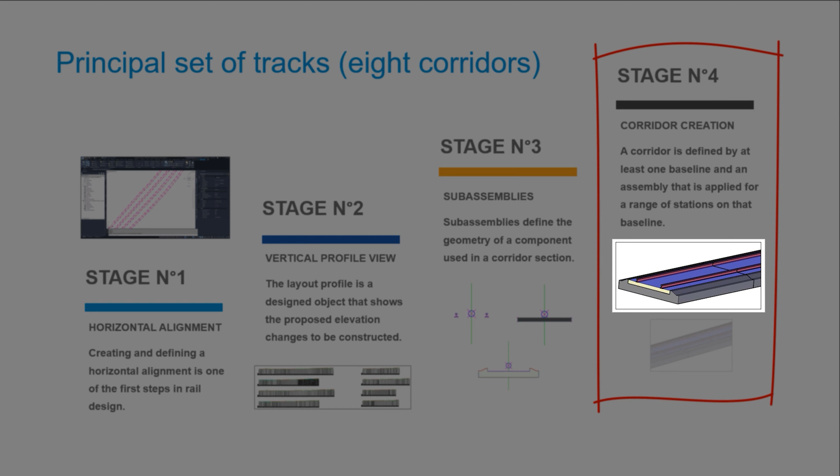Traditionally, when designing a corridor, all assemblies are based on the same stations, or abscissas. SNCF Réseau has another expectation for their maintenance business and asks us to allow different regions per component, different stations for rail, ballast, and sleepers.

So we need to use several baselines in the same corridor definition, one for each component. It is a heavier behavior, but we can automate it.

Underground structures are also completed with the same traditional design approach. Unfortunately, we do not have dedicated survey plans, and the service provider did not complete a LiDAR static scan.

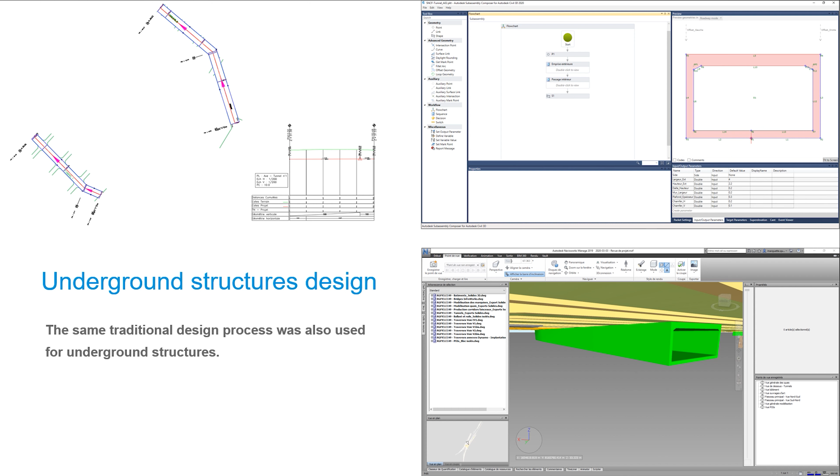Do not forget that underground structures could be an important trade for passenger stations, especially in a highly urbanized city like Paris. Reality capture or topographic surveys are more complex and require particular expertise, especially when you must rely on previous points, as contractors can do for tunnels in the Grand Paris Express project.

Here we just fix some hypotheses, because the civil engineering part is not the top priority for the rail maintenance teams, but this topic is important for the federated model and synthesis phase.

Autodesk Civil 3D also allows another model authoring process without an alignment and profile line. The 3D baseline is normally the merger of these two entities, but you can also ask Civil 3D to use the feature line directly as a baseline for corridor creation.

It is a quicker solution, but you cannot calculate cant or super elevation with this. Please notice you must have at least the 2017 release of Autodesk Civil 3D to use this function.

Step number 1. To start, you need to convert a standard polyline into a feature line object. Please use a 3D polyline directly if you have it, and avoid a 2D CAD object.

You can define a name for the feature line, a style, a dedicated layer, and insert it in a site. For this project, we created the feature line by using 2D center lines dropped onto the existing ground TIN surfaces.

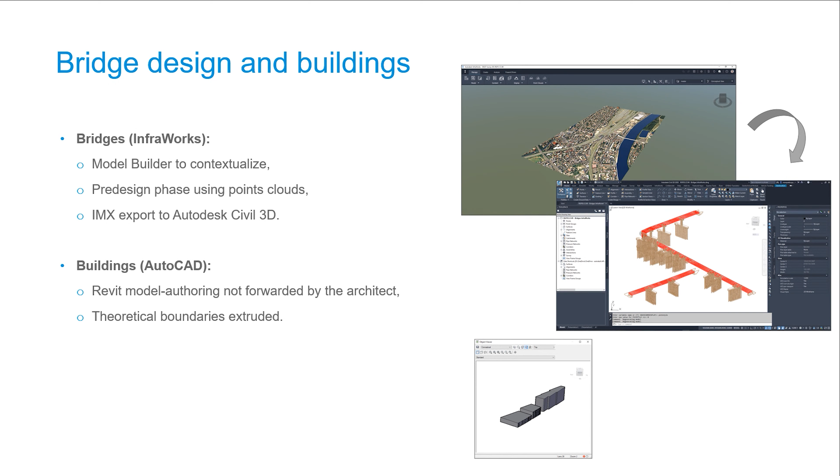Bridges are created using the grade preliminary function of InfraWorks. During the project, we used the 2020 release of Autodesk Civil 3D, and the new bridge category available with the 2021 release was not available yet. We recreated 3 bridges in InfraWorks based on the point cloud elevation, then exported it to Civil 3D through an IMX export.

Bridge design was not really part of our business, so we kept it as single 3D solids. The bridge components are default libraries of InfraWorks, but we could also customize them with Inventor.

Unfortunately, for the maintenance building and the two passenger buildings, Revit models were not forwarded by the architect. So we decided to extrude only the initial plan survey polylines, but why not in the future try to have the original models.

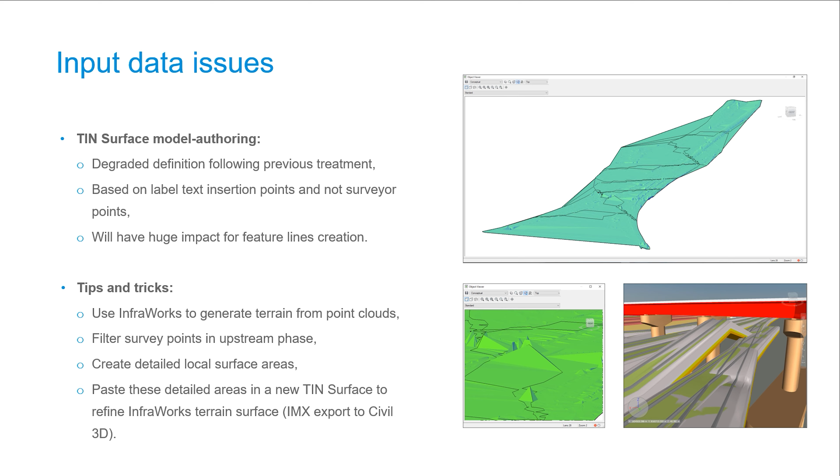For future projects, if you have this kind of issue with site data, use InfraWorks to try to generate the existing ground surfaces from the point cloud directly. Bring it after into Civil 3D with an IMX export and refine the local area with site points or verified polylines.

Another important topic for permanent way studies is the CANT calculation. When you convert a CAD object as an alignment, you cannot start the CANT calculation if the alignment is not detailed with lines, spirals, and curves.

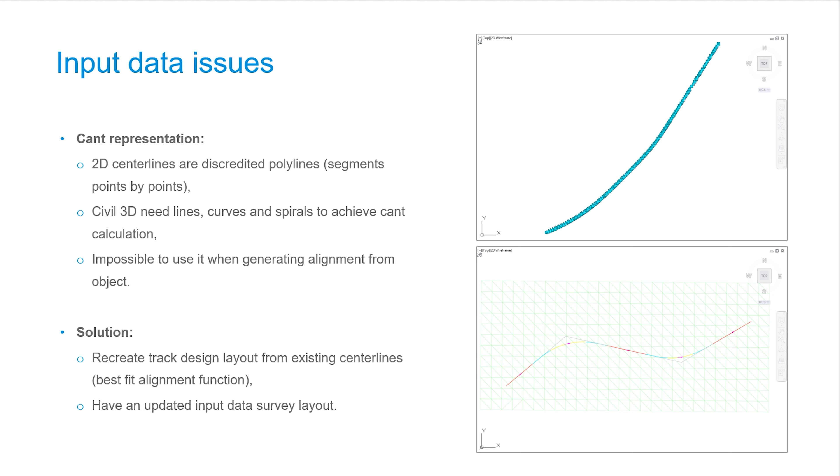I think we can say CAD input data is a nightmare for design engineers. You must recreate the full track layout alignment with the correct geometry. Sometimes it is a little bit tricky because you do not have all horizontal details in the archive paper, or maybe your company does not have it. Moreover, the best fit alignment function of Civil 3D sometimes gives a correct proposition and sometimes not.

To this day, every SNCF database is pretty much tied to one type of data, which explains the multiplicity of the bases and the tools at the team's disposal. The Excel spreadsheets that you can see on the right of the screen are extracted thanks to the use of robots. These robots allow us to process the data so that we can reuse it with Dynamo for Civil 3D.

DEFRAILS is about a rail defect. A rail defect is something that can lead to metal tearing or rail rupture. Each defect is classified following several criteria, such as the localization of the defect, whether it is geographical or where the defect is in the rail itself, the type of defect, the gravity, etc. The defect database can be filtered by permanent way areas, allowing data to be found more easily.

The native spreadsheet export is a raw layout. That's why we use robots to convert, standardize the layout, and automate the ad hoc process.

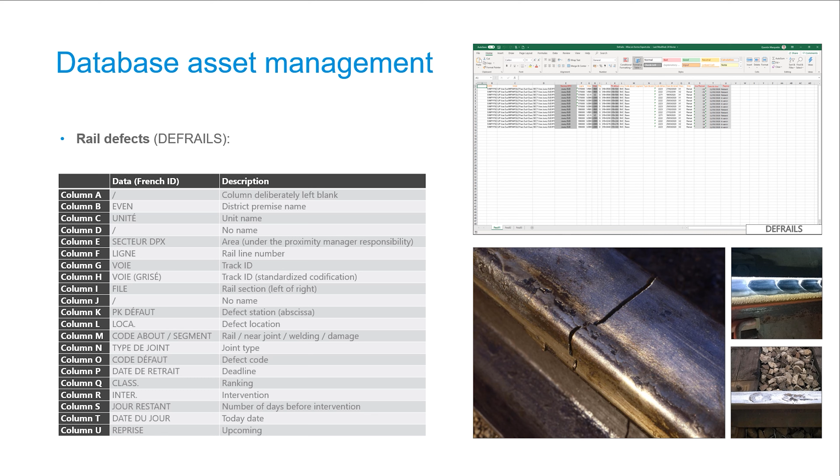The objectives of rail monitoring are to minimize the occurrence of events reducing the passenger safety level and/or affecting the rolling stock traffic regularity. It also allows us to visualize the state of permanent way assets in order to make the best decisions among the different options offered by the maintenance policy.

Geovoix is geometry related. The geometry is the set of characteristics such as the inclination of the railway, the leveling, etc. The geometric defects are classified with the same philosophy as the rail defect, meaning they are classified related to their location, their type, their gravity, and their intervention time limits. All defects in track geometry are listed in a document accessible online. All data can be exported simply as an Excel spreadsheet without additional development.

AD is referring to the dilatation joints. Dilatation joints can be installed for several reasons, such as the need to take over the dilatation of a rail or the dilatation of a structure.

This database is actually taken from a much bigger one. Initially, the data was not intended to be incorporated in the digital model, but things have changed to put the concept forward. Expansion joints are rarely moved or renewed on site. The data does not have the same codification following geographical districts, though the aim was to spotlight critical data to bring feedback and use robots in the future to define and automate the adopted simplified database layout.

JIC is about glued insulated joints. These joints have the function of stopping the electric continuity without altering the mechanic continuity.

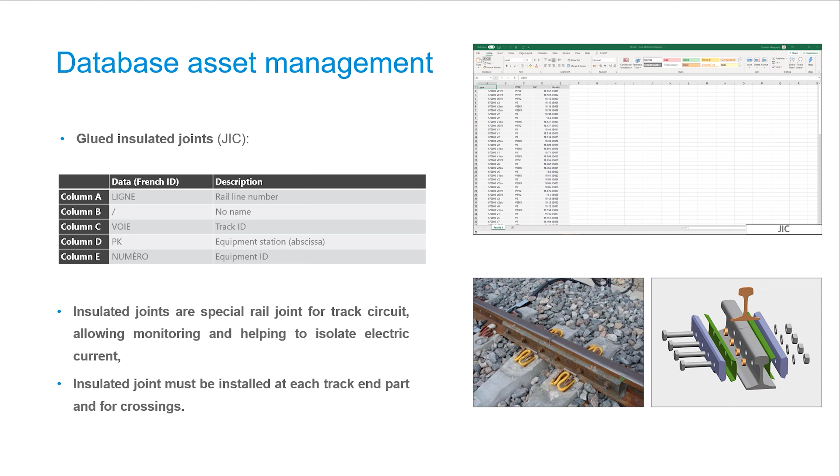The aim with the glued insulated joints is to spotlight the possibility to include additional local data in the process, even if it's not necessarily included in the national database. District and permanent way areas could differ a lot following the geographical region, so aligning these topics can only improve trackability and monitoring itinerary scalability.

ADV is about the turnout. A turnout is an installation that allows a train to get from a track to another one, or just to cross another track. The main goal of the turnout information implementation, in addition to the obvious importance of this installation, was to see that the large density of data was not eating the information readability.

Just like the previous one, this database is also coming from a more complex database. An ad hoc spreadsheet layout was thought for this proof of concept requirement, so in the future, robots will define and automate the adapted simplified database layout.

And the last one is armement. It is related to the railway composition, meaning it is something about the rail type, the sleepers type, and also the ballast.

The ballast is the material ensuring the transmission and the distribution of the strength applied by the rolling stock on the track subgrade. It allows to dampen vibration, permit drainage, and also anchor sleepers following longitudinal and cross-section sides. Heavy mechanical packing is used to correct the track geometry on site. There is enough height of materials. The ballast is an essential component, and the ballast section to implement must be checked to ensure the track sustainability.

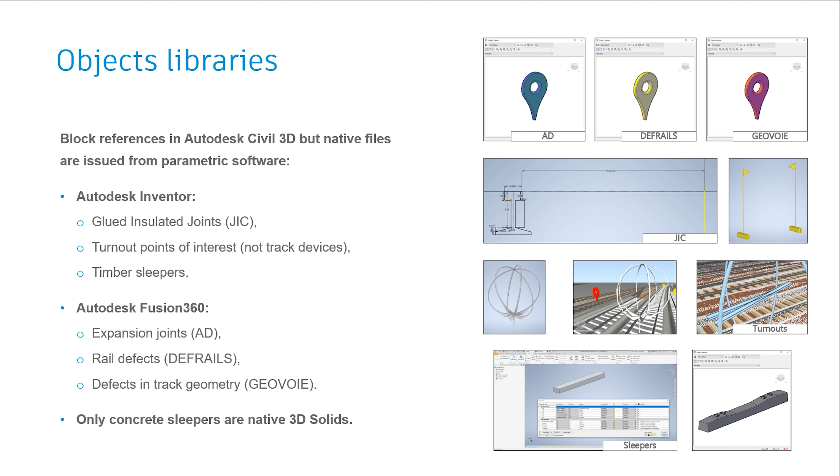Two types of sleepers were modeled. The first one is the timber sleeper, so the timber sleeper model drawing was completed with Autodesk Inventor. The second one is the concrete sleeper; these are actually AutoCAD block references used by Paulo Serra for the promotion of the Dynamo for Civil tool in 2019.

So on one end we use Autodesk Civil 3D to define multiple property sets, so you can see the number of attributes depending on the POIs. On the other hand, we use Dynamo for Autodesk Civil 3D to fill the data in the property sets fields. For the point of interest this is a multi-track script, but for the sleepers, the rail section and the ballast section this is a one script per corridor.

So as you understand, the idea is to collect our database information in order to place them in the right place. Dynamo reads and recovers information from our Excel spreadsheet, then combines the information with the model generation insight. The modification can be things like converting kilometer to meter, or more complex ones.

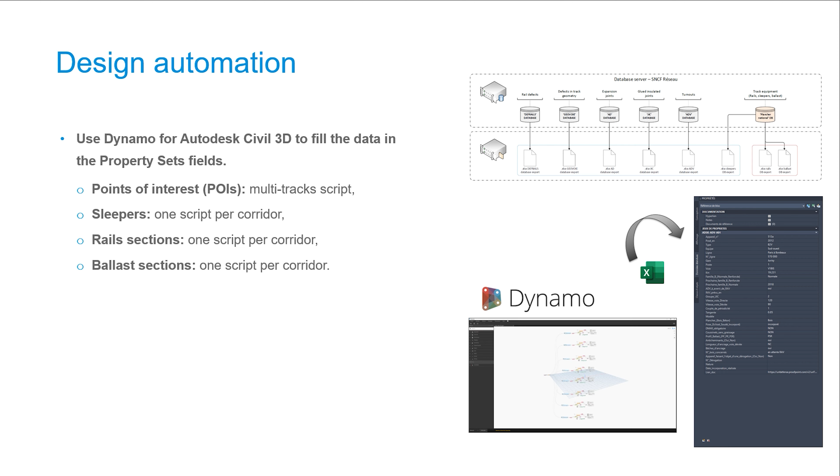The next step is to isolate information referring to each track to then transcribe them on the Civil 3D alignment. Once Dynamo has interpreted the data to transcribe them into Civil 3D, it is now possible to place a POI at their emplacement and to integrate the set of data desired into them.

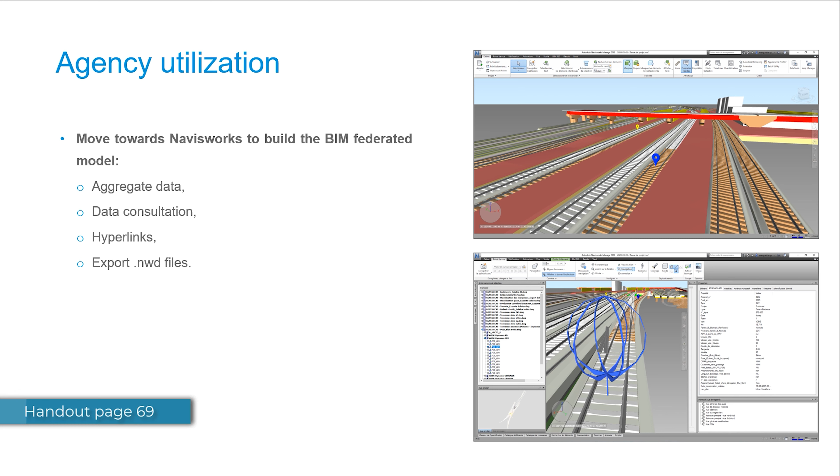So, now that the model is created, we use Navisworks to visualize the model overall. The software allows us to aggregate the different sources of data, to consult the data from the database, so as you can see in the picture on the right, to effect hypertext links that allow us to get to the business application really quick, and also to lead the users to a set of documentation relative to the object they've clicked on, and also to export the model at a t-time, which could always be useful in terms of archiving.

So as briefly mentioned in this presentation, one of the most important points for a proximity manager is the internal corporate workforce turnover. Managers and technicians are only allowed to stay 3 years at the same geographical job position. Each 3 years, another employee comes to fill the position. The time to be comfortable with the internal tool can reach up to 12 months.

Monitoring staff criticism is that the human workforce is not at its full potential over a substantial part of the job position duration. A way must be found to smooth the HR turnover and relieve the end of a knowledge process. These improvements are essential to make easier and to optimize the employee working time.

Another important point is to limit the time required for data consulting and to schedule maintenance tasks. Proximity managers must spend more time on site with the teams. This job is one of the first positions in management working. Employees must develop their technical skills because the opportunity still allows it.

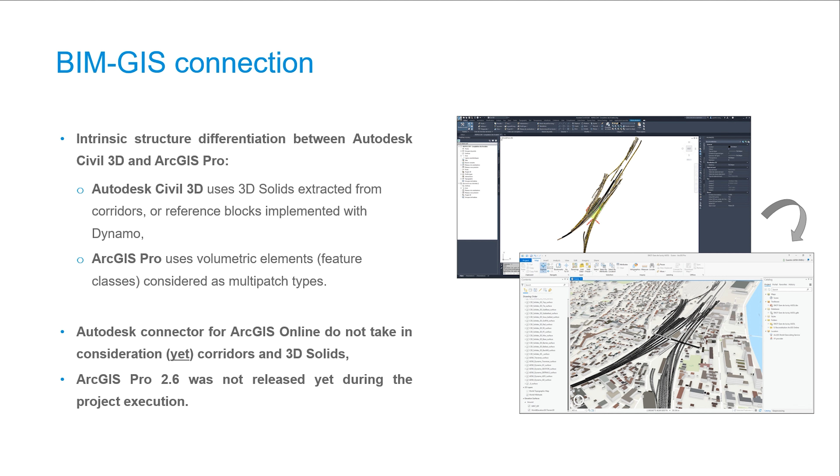Despite the partnership between the two software corporations, the Autodesk connector for ArcGIS does not allow direct export of linear design. And also, when we worked on the project, the 2.6 release of ArcGIS Pro was not yet available. Now, the new release allows reading DWG files directly, but not understanding correctly each component, and we will talk about it in the next slides.

When you do not have a native connection between BIM and GIS for linear design, it is more difficult. It seems more complex, but it is not impossible to achieve. We used an ETL named FME. FME is the acronym of Feature Manipulation Engine and is released by Safe Software, a Canadian company. Maybe some of you know the product as data interoperability for ArcGIS.

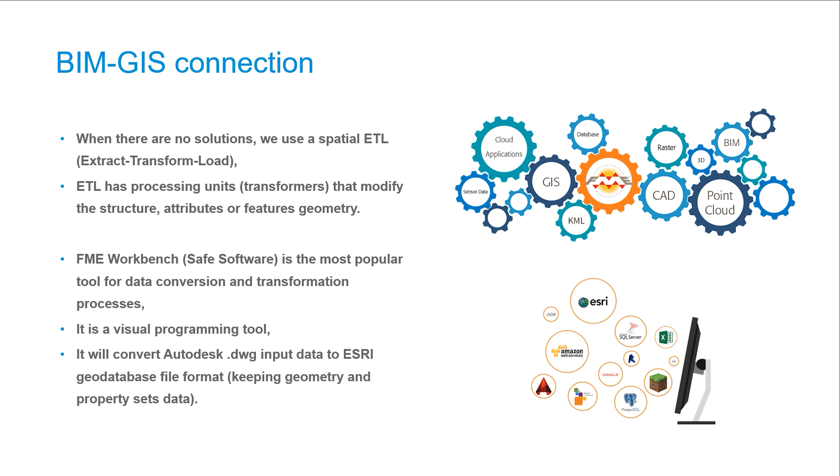An ETL is a tool allowing to extract, transform, and load data. Some geospatial ETLs allow transcribing DWG files to geodatabase file format, also named .gdb. Of course, we are keeping the geometry and all the data implemented in the Civil 3D property sets. Data is transcribed in 3D GIS attribute tables following an information mapping.

Several applications are included in FME Desktop Suite. Please notice that it is available for Windows operating system, but also for macOS and Linux.

FME Workbench is a visual programming tool allowing to use transformers. It is the most important app. FME Data Inspector is a visualization tool. For example, FME is able to open a viewer with your DWG input files.

FME Quick Translator is a simple converter. Maybe some of you already use it with InfraWorks when you try to import a CityGML input file.

FME.exe is software accessible as command line. We do not use it. Safe Software releases also server and cloud services. For example, if you have a lot of files, you can treat it online with batch processes.

You will find enclosed an example of visual programming function with FME. Scripts are using the .fmw file format. On the left, I define my input data, in fact each CAD layer. On the right, I include all the writers to export a geodatabase file format.

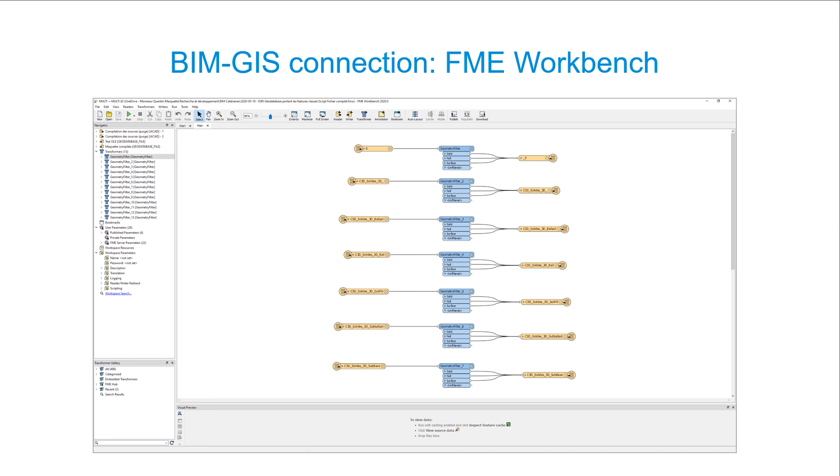For this case, we just use the transformer allowing to keep the geometry. To transcribe the data, it is a little more complex and you need to use additional transformers also.

When you will insert the geodatabase feature classes in the ArcGIS Pro project, you want to stylize it after. That is why you must think to your future GIS utilization when you are completing the model authoring process with Civil 3D. It is crucial to have correct interrelationship between CAD and GIS layer.

For example, during this project, I forgot to split concrete sleepers and timber sleepers into several CAD layers. I had both types in the same Civil 3D layer, and when I searched to stylize timber sleepers in brown in ArcGIS Pro, my concrete sleepers were also in brown. But in real life, of course, concrete must be in gray, not in brown.

So just one advice: when you are preparing to use your Civil 3D input data with FME, just check before to have classified each CAD layer.

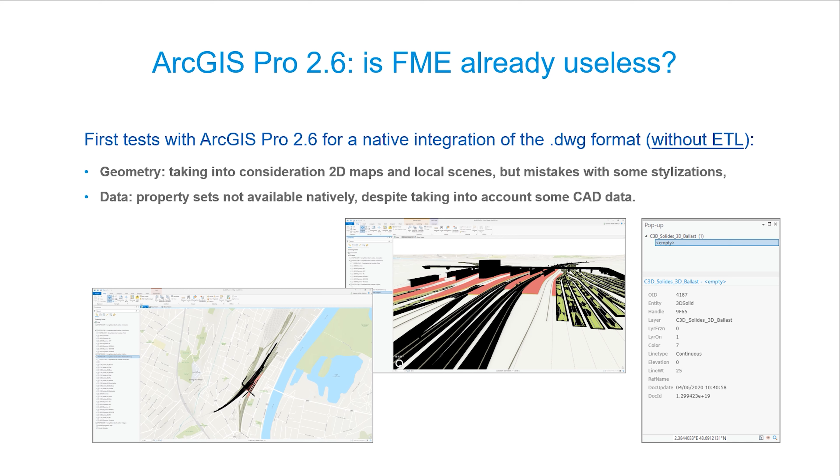For native stylization, the tool does not take into consideration all the CAD colors for the moment. About projection system with DWG files, we still have some issues.

For our first test, we succeeded to insert DWG in a 2D map and also a local scene, but we noticed some warnings about projection systems. But we have something displaying on the screen.

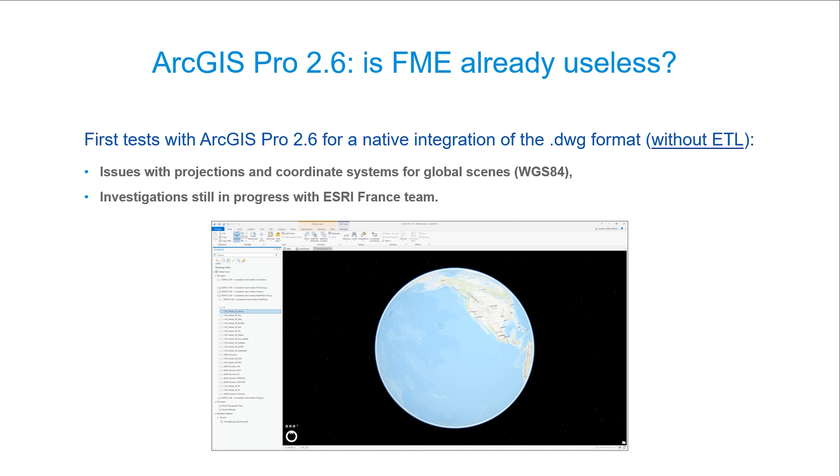Unfortunately, for global scene configured with WGS84, also known as LL84, we do not succeed to display something. Investigations are still in progress about it.

The next expectation for SNCF Réseau is to bring the model on site for the agent. It's difficult to use the InfraWorks mobile app with the iPad because the application is not available, and BIM 360 for SNCF is not the default common data environment. So the choice was made to use ArcGIS Online with corporate tablets.

Unfortunately, it is not possible to export directly the ArcGIS Pro model to ArcGIS Online. The platform online uses WebGL technology to display the content and needs some processing completed beforehand.

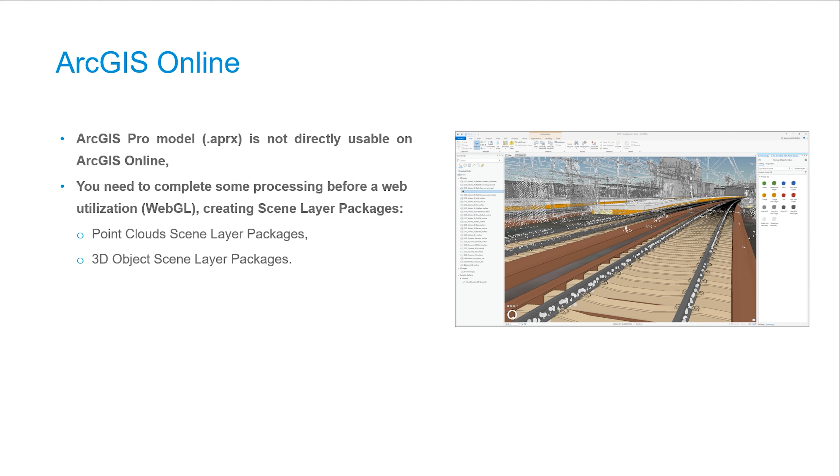We have two kinds of data in our model, point clouds and 3D objects. To export it, we need to launch a function to convert it as scene layer packages, also named SLPK. Each SLPK file must be uploaded after on ArcGIS Online to rebuild the 3D scene on the cloud. Only after this can you use it from your account panel with a tablet on site.

So now let's make a quick overview of our workflow. The very first step is to take the LAS file format and send it into Recap Pro, so that Recap can transform the file into .rcs or RCP.

The next step is to send those files into InfraWorks so that we can build the preliminary bridge design.

The next step is, once you get your 3D polylines and land surveyor input data in DWG, you can send it into the Civil 3D software so you can build the TIN surface for the model authoring. This surface will be useful for our permanent way, station platforms, canopies, subways, and model authoring.

There are two kinds of approach. The first one with alignment, vertical profile view, and subassemblies, and the second one which uses feature lines and subassemblies.

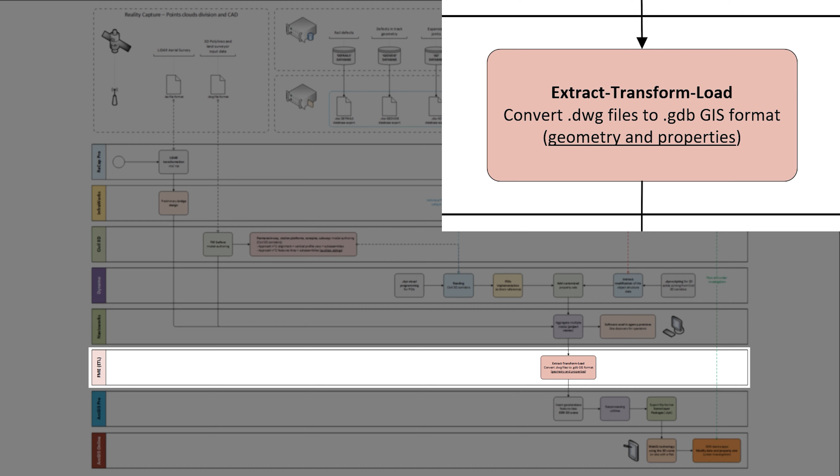Then we're going to use the extract, transform, load software to convert the DWG files into GDB GIS format. After that we're going to insert GeoDatabase feature class as a scene using the geoprocessing utilities and export the file format into scene layer packages.

And finally, for the last step, we're going to use ArcGIS Online so that we can use WebGL technology with the 3D scene on site with a pad.

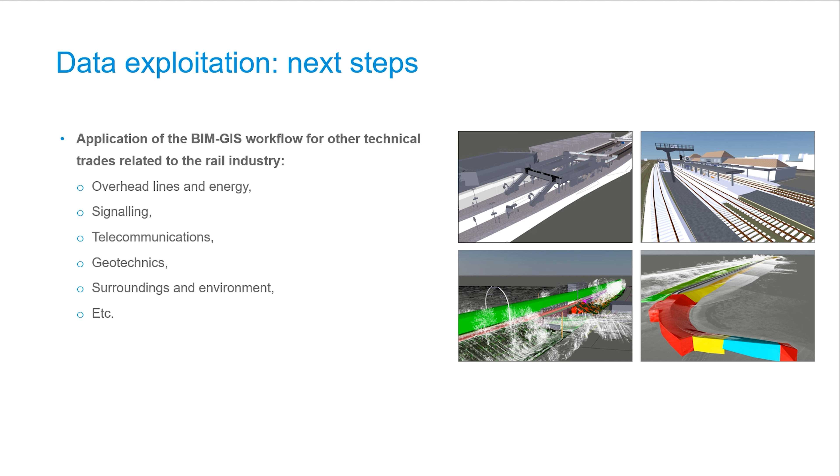So the next step is to continue working with this workflow and integrate other rail trades: OLE (overhead lines) and energy, signaling, telecommunication, geotechnics, surroundings and environment.

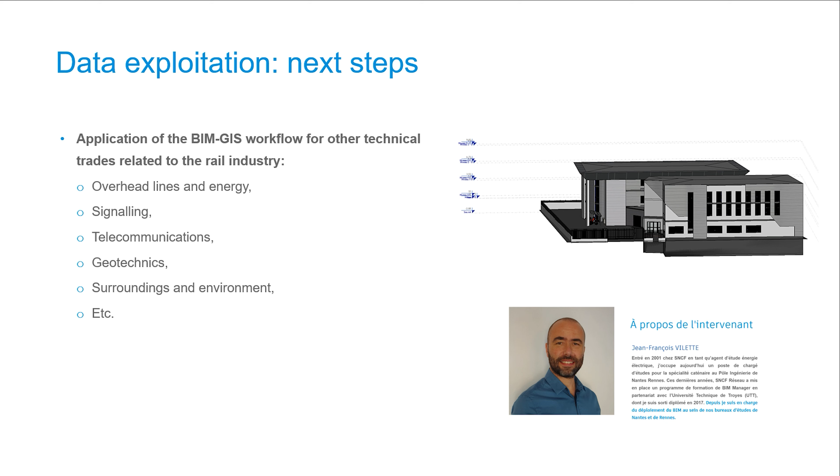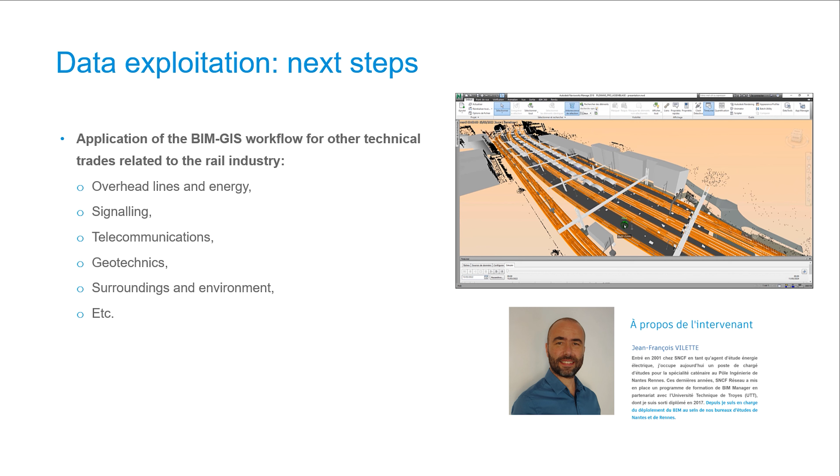About the OLE business, we invite you to watch the class of Jean-François Vilette if you are French speaking. Jean-François is based in Nantes at the Regional Engineering Center of SNCF Réseau, and he is also a speaker for this digital edition of Autodesk University. His class relates to the BIM implementation for OLE over the last two years, and especially about the Revit and Navisworks workflow.

So, City Dashboard is a web app based on ArcGIS, also a demonstration completed by Gaëtan Lavenu in France during a live conference in 2017.

ArcGIS is a web GIS platform, which means its architecture can incorporate new tools and new technology, allowing connection to real-time data flow through API and web services. We can thus report data from on-site sensors, connected objects, social networks, etc.

The tool can become a data aggregator, a real dashboard that will govern a variety of data flows. The layout is visual, in three-dimensional environments, whether in office premises or on a tablet touch screen on-site. All these elements tend toward a monitoring and hypervision solution.

Esri France already started working on this by making available a dataset named City Dashboard Paris and City Dashboard Grand Lyon.

So to push the concept forward, we can add some data flows into the project. We can use the Waze API, which is about road traffic, accidents, and fieldwork data. We can use closed circuit television camera flows, which is for the SNCF security teams.

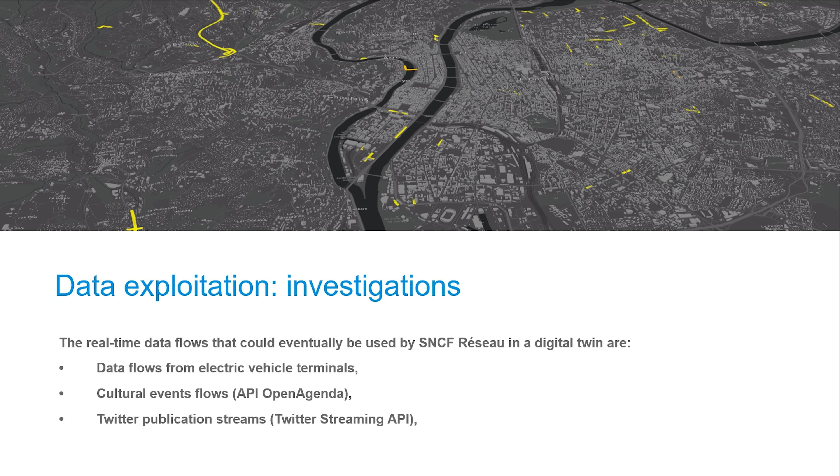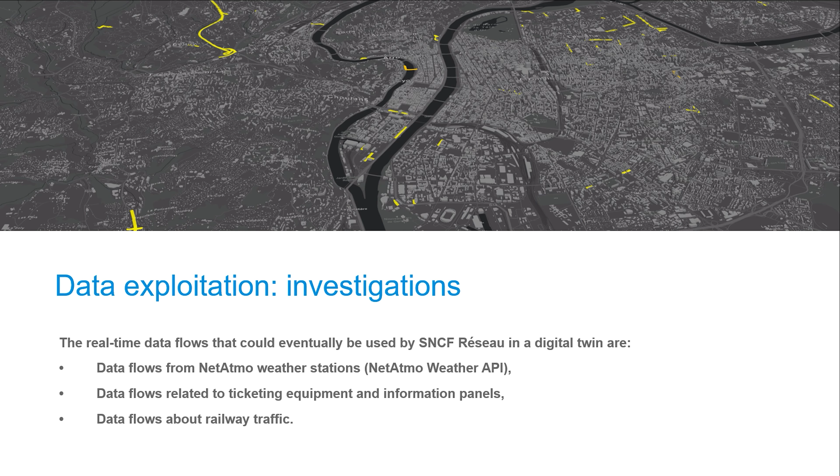We can also add data flows on self-service bicycle stations, data flows from electric vehicle terminals, cultural event flows with the Open Agenda API, Twitter publication streams with the Twitter streaming API, data flows from Netatmo weather stations, data flows related to ticketing equipment and information panels, and data flows about railway traffic.

Esri portfolio includes several mobile apps: Survey123, Tracker for ArcGIS, Collector for ArcGIS, Explorer for ArcGIS, etc. We are interested in Survey123 and Tracker for ArcGIS. SNCF uses the Kiseo platform a lot to complete forms and surveys on site, and we will try Survey123 to check the interaction with the ArcGIS Pro project.

Tracker for ArcGIS mobile app was before dedicated to utilization with ArcGIS Enterprise and is now available with a simple ArcGIS Online subscription. It follows the position of an agent on site, whether walking or driving, and the app can create an itinerary.

This shapefile could be reused, why not directly with ArcGIS Pro, but also with Autodesk Civil 3D, with a map import function. We could imagine recreating quickly a Civil 3D corridor based on a feature line and a simple subassembly. It could represent a path, or maybe a vehicle boundary, or imagine using it in Navisworks in the future for potential clash detection, etc.

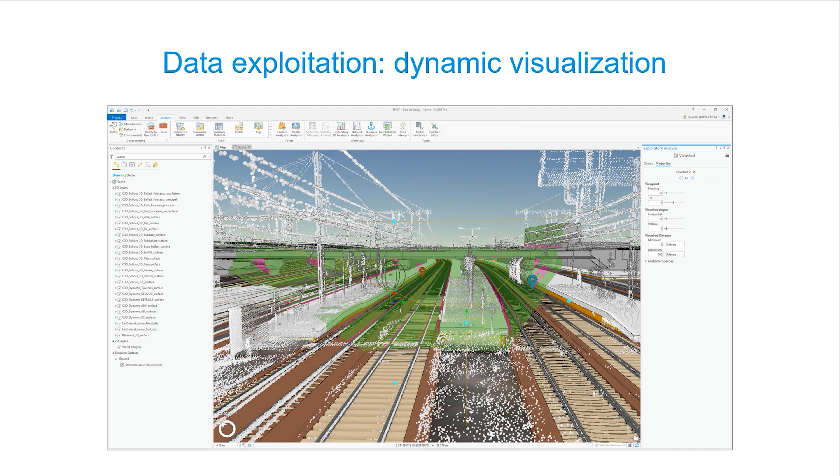To come back to SNCF, the dream of each signaling engineer is to be able to see the signals when you are driving a train. We would like to investigate this function and see if with additional development we will be able to use it as a dynamic visualization in a rolling stock cabin. For example, Deutsche Bahn, owner of the German network, already started this kind of investigation, but with InfraWorks.

During this proof of concept, Béranger used Excel a lot. Power BI is a new tool of Microsoft for data layout and charts. It is so immersive. Unfortunately, we did not have enough time to prepare content with this tool for this project, but it's something we keep in mind to help us in the future for data management.

Software implementation is a huge topic for SNCF Réseau. This proof of concept highlighted the possibility of bringing back BIM data to GIS attribute tables, but some points are incomplete. On-site, it's often not possible to have access to cellular networks in 3G or 4G generation, and we really need an offline mode, and to be able to edit attributes on-site and bring back the modification when we return to the office. It is something we need to investigate.

The road to success is very long. Moreover, SNCF is the owner of the asset, and it's important that the solution must be secured on SNCF servers and not on the cloud. The company is very focused on the on-premise mode, and IT security is an important check before starting a massive deployment.

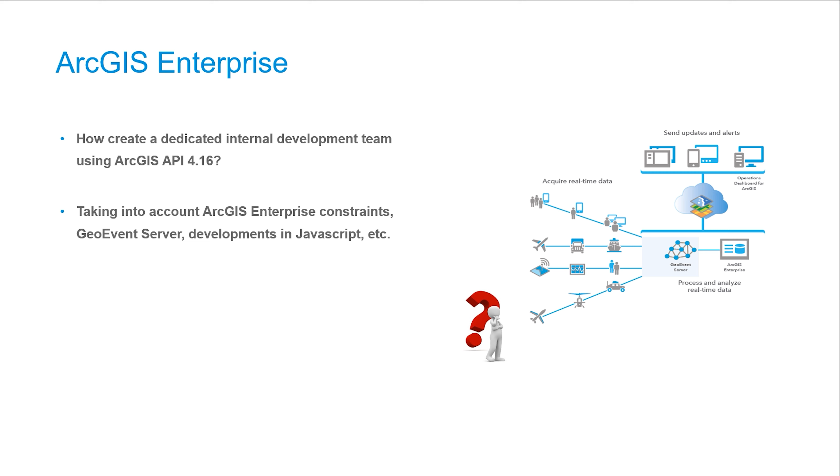If SNCF Réseau made the choice to use ArcGIS as an official platform for the digital twin, it would be mandatory, for example, to use ArcGIS Enterprise. Implementing the solution is technically complex, and managing real-time data flows also requires GeoEvent server. For the moment, we are not ready to jump directly into these developments. We will reinforce what we already completed during this proof of concept, and we will try to give the best of ourselves and continue to investigate all the potential doors we already have.

The project was a nominee in the Golden BIM Award, a ceremony that rewards the best projects in France and overseas. This year there were 11 project categories. The project was initially named in the Operation and/or Maintenance category, but was chosen by the jury for a Silver Award and won in the Infrastructure category.

Obviously, we are supporting this project presented to you during this AU. This project highlights how BIM can bring value for railway. We are convinced that connecting BIM with our internal database, including GIS, will allow us to improve monitoring, carry out our maintenance, and streamline our internal process. Thank you and enjoy.